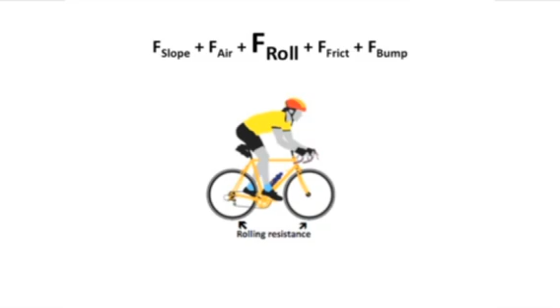Okay, here we go into rolling resistance, another one of our opposing forces. Now, rolling resistance is shown here, mainly resistance between the tires and the road. Now, one common observation of mine is the following. People want to ride a lightweight bike, and they want ultralight wheels. They want aero wheels, ultralight hubs, bladed spokes, carbon rims, all that stuff. And then they train and they lose weight.

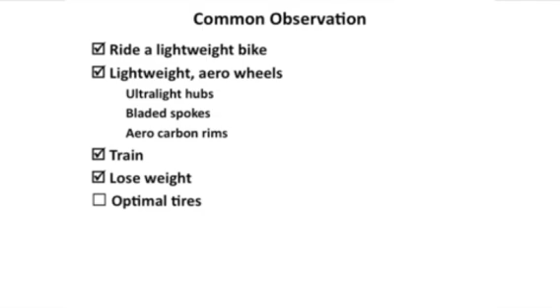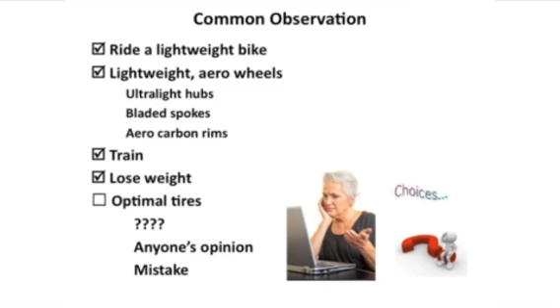But when it comes to putting the right tires on the bike to get the optimal benefit of all of the other equipment that they've invested in, they just don't know what to do. They ask anybody's opinion. They go to a bike shop and a mechanic will say, well, we like those tires over there. People buy a lot of those. And somebody will say, okay, give me 2 of those, and put those somewhat unknown tires on that expensive bike with all that equipment and with all of the training you've done. This is a mistake, and here's why.

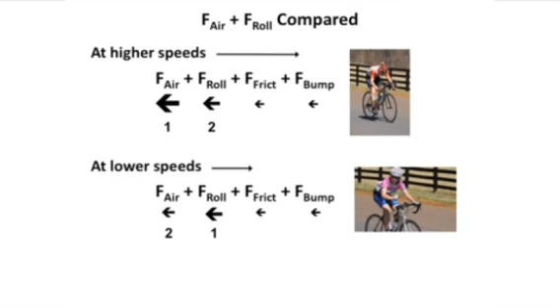If I compare air resistance and rolling resistance at higher speeds, the resistance from aerodynamic drag is our #1 problem. Rolling resistance is #2. Friction and bump are much less significant. At lower speed, the resistance from the air is the smaller problem compared to rolling resistance. The point of this is that rolling resistance is either our biggest or our second biggest problem to deal with. So it's something to contend with.

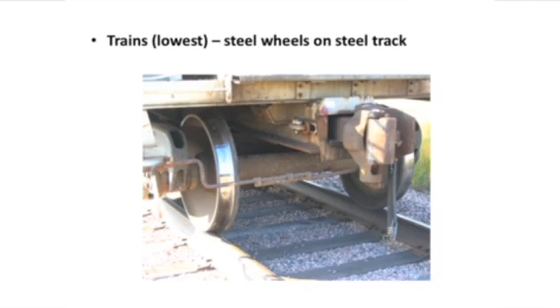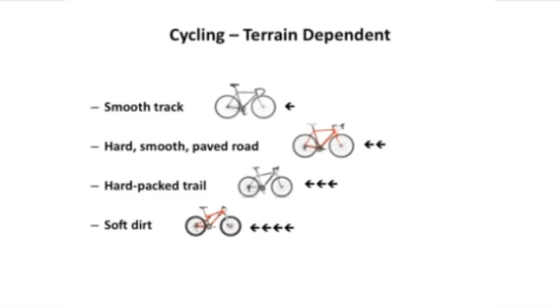Here we see a train on a track. This is the lowest rolling resistance you can have, steel wheels on a steel track. When we're cycling, we have varying terrain. In the first case, we're looking here at a track bike, where we have a smooth track, we have minimal rolling resistance. Under that, a road bike riding on hard, smooth, paved road, the rolling resistance is higher. It's somewhat higher again under that when we start getting to the mountain bikes with hard packed trail, and then soft dirt has the highest rolling resistance.

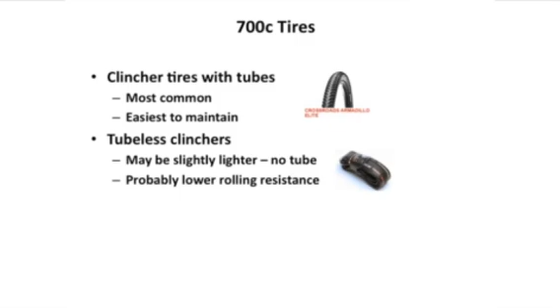With 700C tires, we're looking at clincher tires with tubes. These are the most common. They're also the easiest to maintain. These are some tubeless clinchers. There's another possibility. These are a relatively new concept on the market, and these are lighter. There's no tube in them, and these probably have a lower rolling resistance also.

Now, with respect to that, if the tire stays on, that should not be the test of whether it's glued properly or not, because you can have a tire stay on, that is not roll off, but still have quite a bit of rolling resistance because the tire can squirm around on the rim if it's not glued properly. To be glued properly, there should be glue all the way across the rim between the rim surface and the base tape on the tire. If that's the case, it won't squirm, but it will also be very hard to get off if you do have a flat tire.

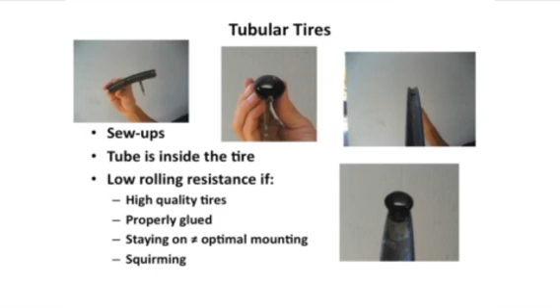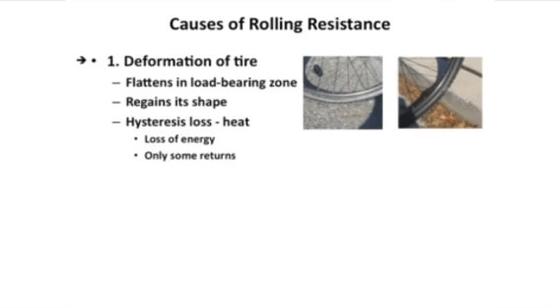There's also rolling resistance loss when it comes to friction between the tube and the tire, and I'm quoting David Gordon Wilson here, saying, the energy loss due to the rubbing of 2 materials, the inner tube and the tire against each other, and this is a pretty large source of loss of energy also due to that kind of friction. Maybe this is an argument in favor of tubeless.

Tube materials are of two different kinds. Butyl rubber, polyisobutylene, is the most common type. These are inexpensive tubes and they're by far the most common. But there's another kind that is made of latex rubber. These are more expensive, but they reportedly have 10 to 15% less rolling resistance than butyl rubber tubes. So maybe this is an option for you to consider to use during races.

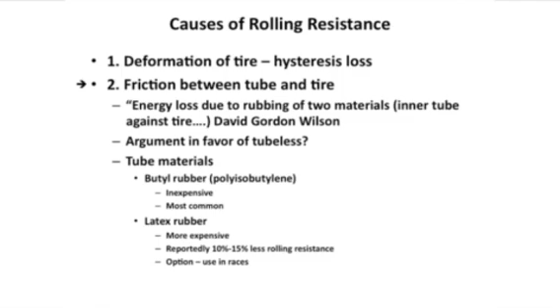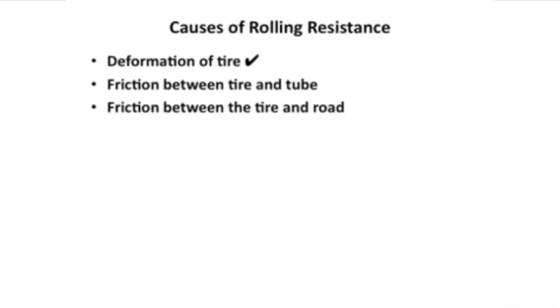And the third kind of friction loss that's part of rolling resistance is between the tire and the road. And this has to do with the tread design and the material used. Of these three, deformation of the tire is probably the most important one.

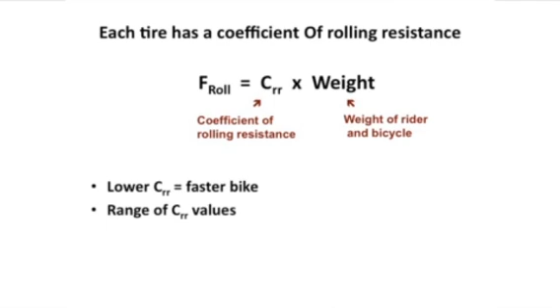Now, each tire has a rating associated with it called the coefficient of rolling resistance. And the force that's necessary to overcome rolling resistance is equal to the coefficient times the weight of the rider and the bike. The lower the coefficient of rolling resistance, the faster will be the bike. And tires come with a range of coefficient values.

All the way on the left is a train, the lowest possible coefficient, 0.0002. All the way on the right there is a car tire. Car tires have a fairly high coefficient of rolling resistance. And bicycle tires are in the middle. But even those, there's a pretty big range from the lowest to the highest of bicycle tires. I'll give you two examples of why this makes a difference.

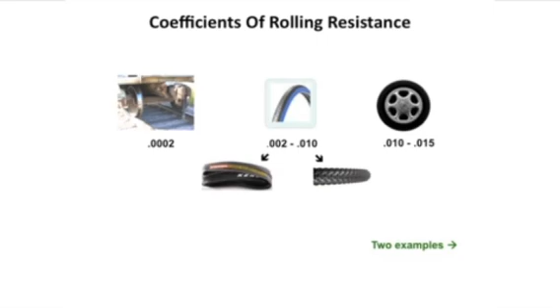Here's an article I found by Rick Ashburn that was written in 2007. He studied what happens in an Ironman triathlon, which starts with a 2.4-mile swim and then 112 miles on a bicycle, and then with the energy you have left, you just go out and run a marathon.

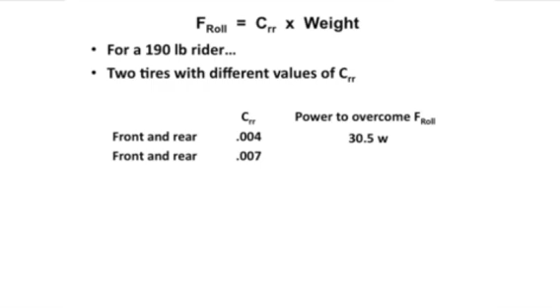Now, here's what Rick computed: for a 190-pound rider, I take two tires of different values of coefficient of rolling resistance. Supposing I ride with one that has a front and rear tire with a coefficient of 0.004, and I compare that with another tire that has a front and rear coefficient of 0.007, then in the case of the first one with a coefficient of 0.004, the power to overcome that rolling resistance is going to be 30.5 watts. And in the case of the higher coefficient of rolling resistance, for the same weight rider, the power to overcome that force is 53.4 watts.

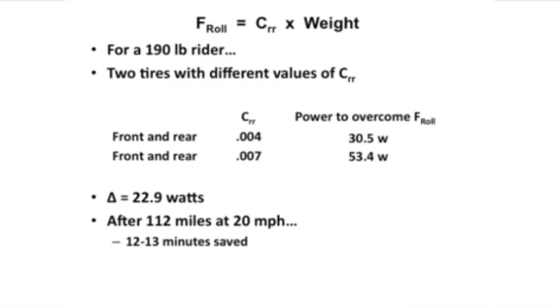So I have a difference of 22.9 watts of power that I have to put out to go a certain speed simply because of the difference in the coefficient of rolling resistance of two tires. Now what that means is that, let's say after 112 miles riding 20 miles an hour on my bike in the triathlon part of the Ironman, I will have saved 12 to 13 minutes simply by riding on the tires which have a lower coefficient. And that's about a 5% time reduction, which is rather huge over the course of the triathlon part of an Ironman event.

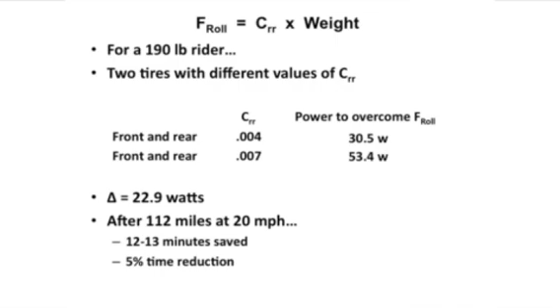Here's another example. I had several conversations with a fellow named Doug Wager who lives out in the Midwest someplace. And here's the problem that Doug expressed to me over many phone calls. He said, I go out and I ride with my friend. I can hang with him when we're climbing. We ride side by side, no problem, but I fall behind on the descent. And so we went through a process of trying to troubleshoot this over the phone. I said, well, Doug, why don't you try this or try that and then call me back?

What we found out in the end was the problem was just the rolling resistance of his tires, because he tried different tires with a lower coefficient of rolling resistance, and now he's able to keep up with his friend on the descents. So everything else is the same except the different tires on the bike made a big difference in his speed.

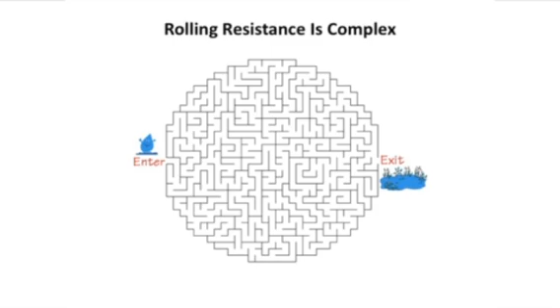Rolling resistance is complicated, so navigating your way through this maze is tricky. As I said, there are a lot of articles on the internet. It's worth exploring some of those and doing some of your own research. Investigate, check out some of those articles, look at manufacturers' websites, visit discussion forums, and you'll probably learn quite a bit. I don't think anybody knows everything there is to know about this topic.

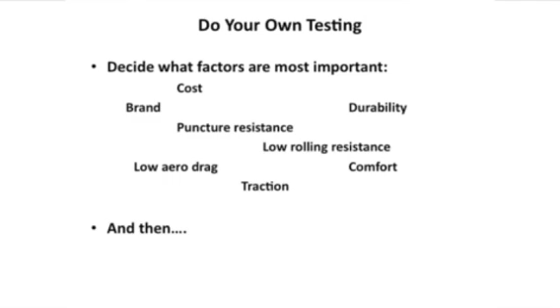Another thing you can do is your own testing. Decide what factors are important: cost, brand, durability, puncture resistance, rolling resistance, comfort, traction, aero, and so on. And then go to a bike shop and test some tires and share the results. Let's say you make that pitch to them: if you let me test some of your tires, I'll share with you the results that I get, and you'll be able to learn from that.

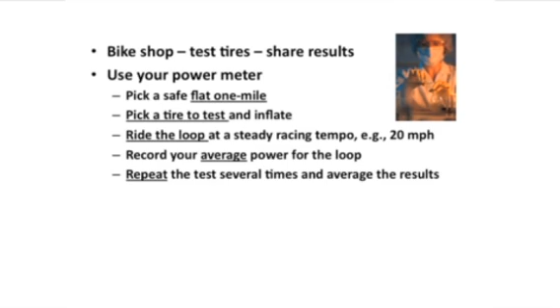And then you use your power meter. You pick a safe 1 mile flat loop, and you pick a tire to test. You inflate the tire, and then you ride that loop at, say, a steady tempo of 20 miles an hour. Record your average power for the loop. Repeat that several times just to make sure there's no irregularities in just that one ride.

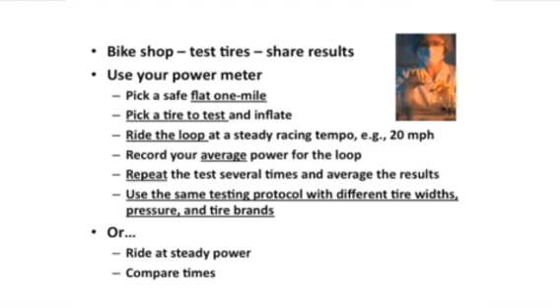Repeat it several times, average the results, and then use the same testing protocol with different tire widths, pressures, and tire brands. If you do that, you'll find some good data that will help you understand how you can reduce the rolling resistance by varying not just the brand and model of a tire, but also the width and the pressure. You could also do the same thing by using your power meter, riding at a steady power and comparing the times.